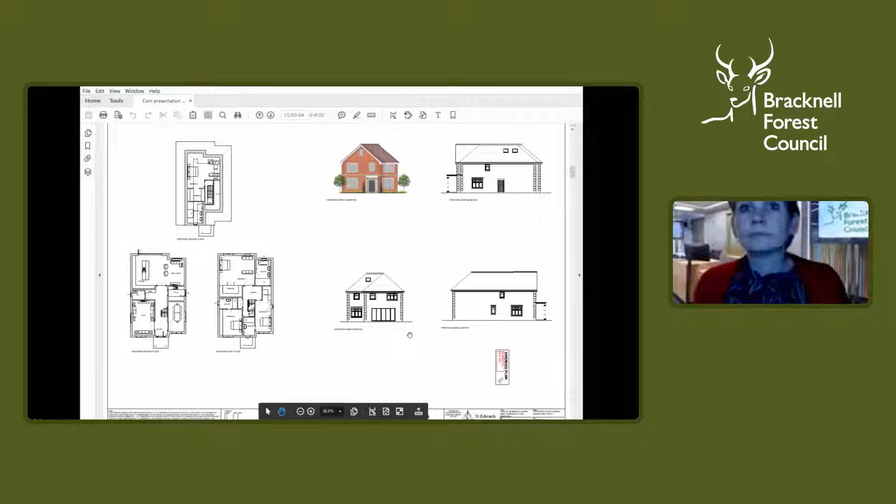Just to show the elevations. The elevation to plot 1 shows a traditional design with a new level of accommodation created in the roof space, lit by a window on the front elevation, then further roof lights to the side and rear elevation, with the additional second floor accommodation shown on the floor plan here.

Plot 2 again follows the same design with the additional accommodation in the roof lit by a second floor window and roof lights. Then plot 3, again a 2.5-storey dwelling, with accommodation again achieved in the roof with roof lights on the front and rear elevations.

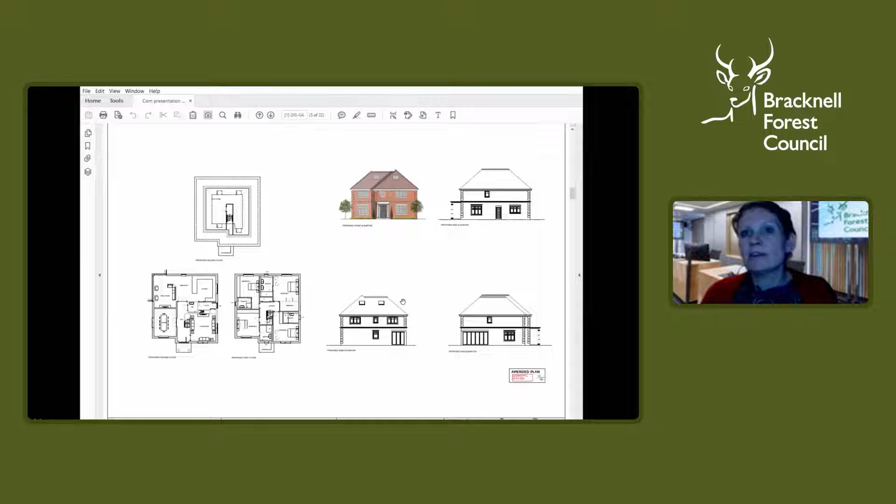I'll just remind members of the approved elevations. So this is the previously approved design for plot 1, plot 2, then the previously approved plot 3.

The photograph on the screen shows the existing 7 Sherring Close. A view of 7 Sherring Close from the rear. Then a view of 7 Sherring Close looking towards the rear of 29 Warfield Road. And a view within the site from 7 Sherring Close looking towards the properties in Husson Road.

A further view of a property along Sherring Close, number 8. Then looking at the side of 29 Warfield Road. A further view of the side of Warfield Road where the access into the site is achieved. A further view looking to the rear, from the rear to the side of 29 Warfield Road. A wider view from in the garden.

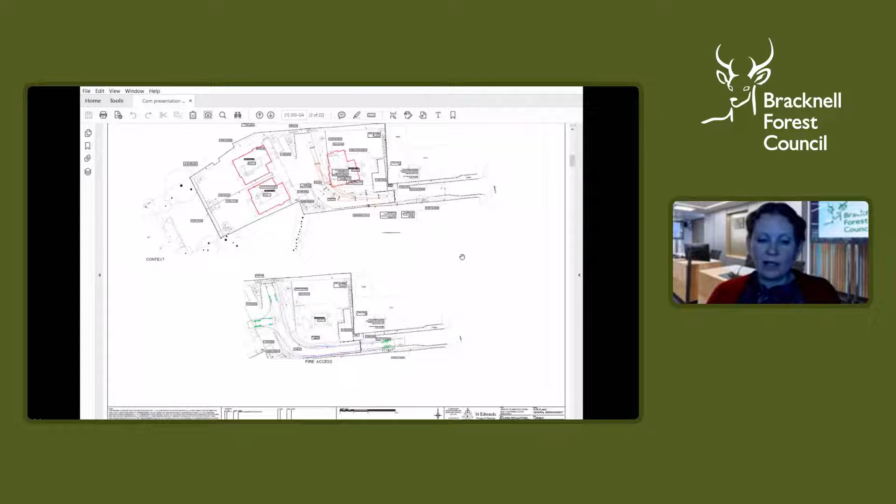The application relates to a full application for 3 dwellings following the extant consent for 3 dwellings. The site falls within the settlement boundary and the principle of 3 houses on the site has therefore been established. The main changes to the dwellings are their designs and sizes and the creation of rooms in the roof to be lit by roof lights. The heights have been amended to be the same as the extant consent.

The site layout has shown the position of the new houses compared with those approved. Separation distances would still allow an acceptable layout to be achieved, whilst maintaining an acceptable relationship with the neighbouring dwellings and impact on the character of the area. The proposal provides 3 parking spaces for each dwelling, which is acceptable to the Highway Authority. The position regarding biodiversity and drainage was addressed under the extant consent, and conditions are proposed to be repeated to address these matters. The application is therefore recommended for approval in line with the recommendations within the committee report and supplementary report.

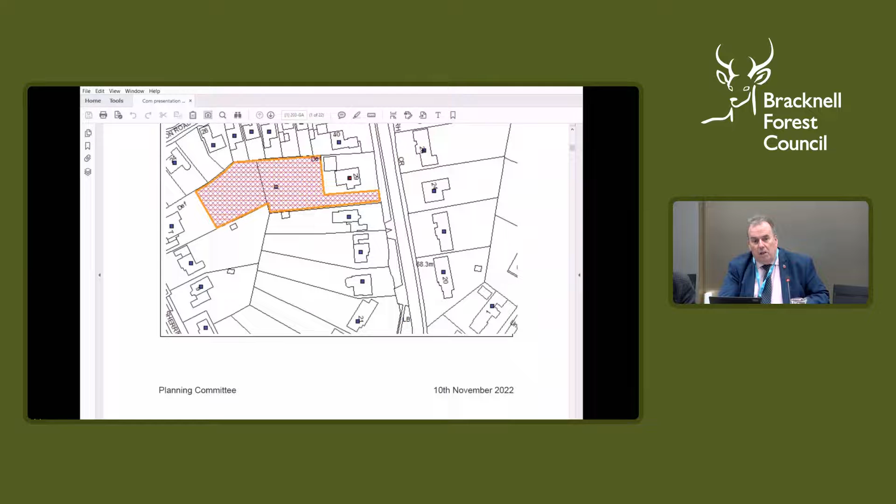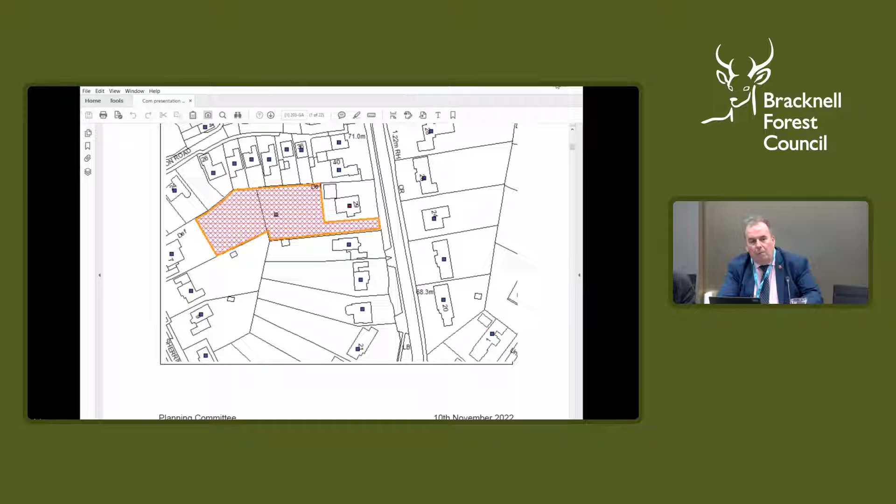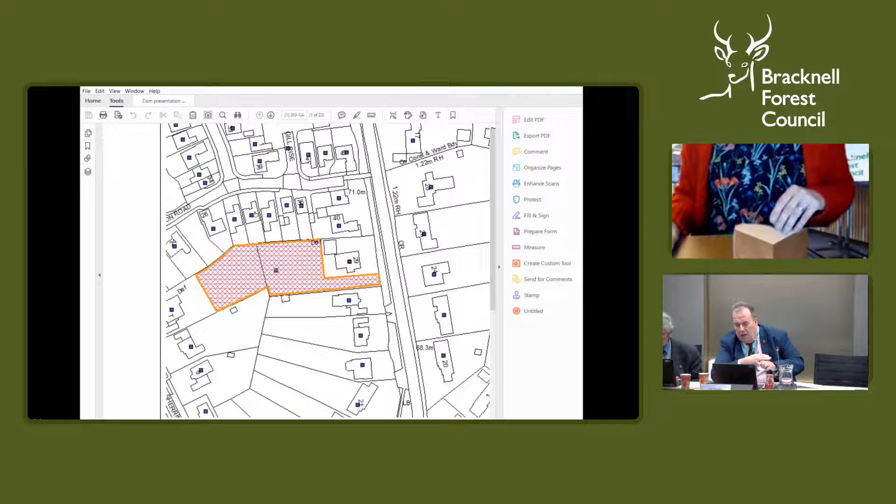Councillor Brown: Thank you, Chair. The first question for me is, what are the differences between the 2 applications before us tonight? If you look on the picture that Katie showed us, Katie, could you put that up again, the one with the red lines, with the new layout? That's the footprint, but there are a number of other things as well, including position. Could you just explain what the differences are between the approved application and the sought application? Thank you.

I'll just share my screen again.

I'm having some difficulty - I think what you're looking for might be on the supplementary report, isn't it Katie? Did you want the actual size differences? No, those are clear on the diagram you showed, but do the conditions like biodiversity and the soft and hard landscaping all coincide with one another now, if these are accepted? Yeah, if you look on the supplementary report, they've all been rewritten to reflect the new application.

But the things on the supplementary are for 365, and 425 has had challenges which have been answered, but I don't know whether they're the same. Could you clarify your question? 365 had lots of different changes under section 3, and will have if 425 didn't go through, but 425 seems to have taken precedence. Are there any differences between those two in terms of conditions or anything else?

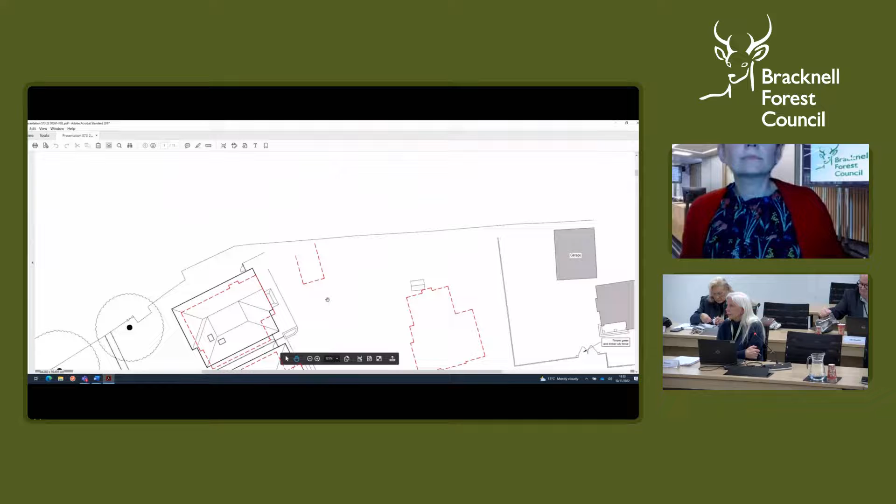On plots 1 and 2, the roof lights have been positioned looking inward, then to the rear, with a separation distance of over 30 metres to the rear of Sherring Close, so there'd be no overlooking to the properties in Husson Road. On plot 3, on this elevation, they're set looking this way, then that way, so there would be no overlooking from this property to the properties in Husson Road.

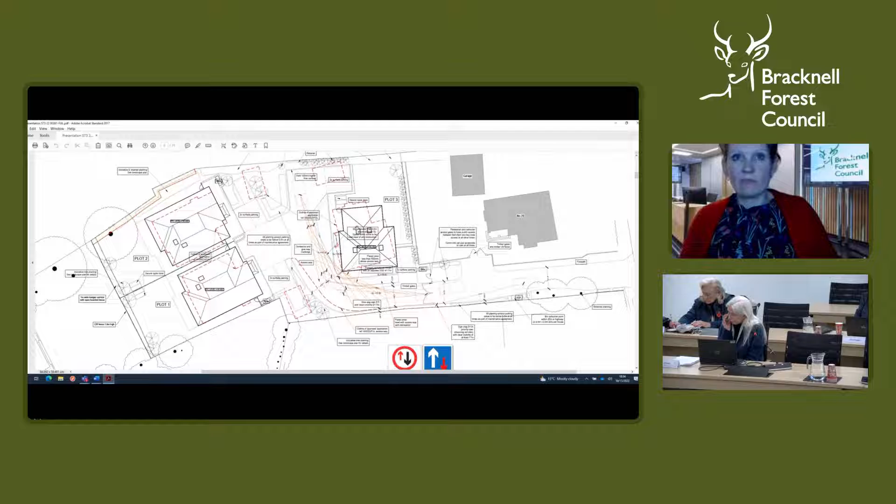And also there are conditions for the roof lights to be set. Plot 1, plot 2 and plot 3 are to be set 1.7 metres above the internal floor levels, which would prevent any overlooking.

Thank you very much, Katie. Councillor Dr Barnard, can I just ask?

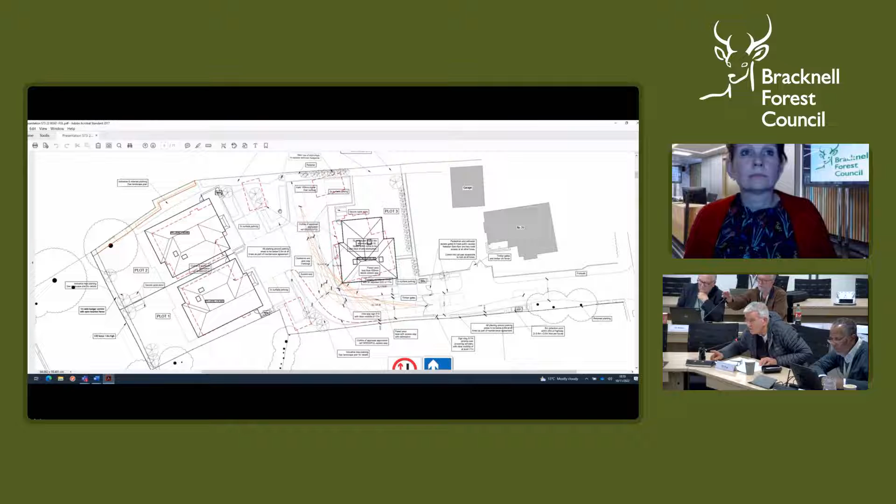Probably again this has been covered, but I noticed they talk about biodiversity - presumably this hasn't been altered from the original permission? That's the question. I noticed there's no report from the biodiversity officer, unless that's in the supplementary, but...

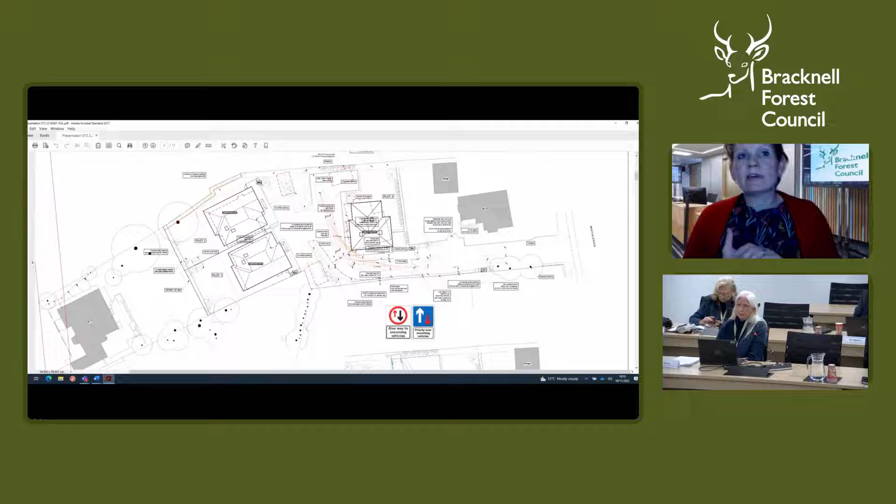No, the biodiversity officer hasn't responded on this application. However, the last extant consent had strict conditions to do with biodiversity, mainly relating to badgers known to forage on the site. Those conditions have been repeated under this application, and under the next application I present, conditions have been addressed in terms of biodiversity, with the biodiversity officer commenting on the mitigation for the badgers.

Okay, thank you. Just for your information, you may not have the supplementary report in front of you, but condition 17 of the supplementary report says the biodiversity enhancements shown on plan 21021 shall be performed, observed, complied with prior to occupation of the dwellings and retained in perpetuity.

Okay. Councillor Dr Barnard, thank you very much, Chair. I have 2 questions. The first relates to when we considered the application on this site before - was there a reason why there was no requirement for any visitor parking?

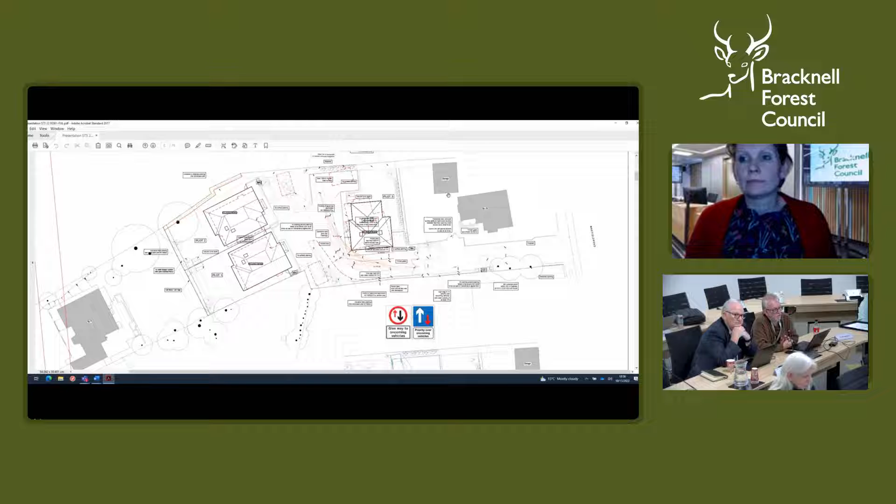Because there's been building work along that road recently, and looking at these plans and the old ones, the only place visitors could park is actually on the main road, because there are 3 spaces. Looking at the layout, I'm not convinced, at the weekend for example, if you had 2 cars plus a child's car plus a visitor, it could soak it up. So it's more really reflecting back on that.

And then I've got another question about the neighbourhood plan, Bracknell Town Council neighbourhood plan. If I can pick up Andy - do you want to pick that up? Yeah, Andy Wells, Highways.

Thank you. Our parking standards SPD table 6 for residential development does not require visitor parking for developments of fewer than 5 units. So there is no parking standards SPD requirement for visitor parking on this development layout. That's the simple answer to your question.

No, thank you. So to be clear, there's an acceptance, therefore, as there was last time, that visitors will have to park on the main road.

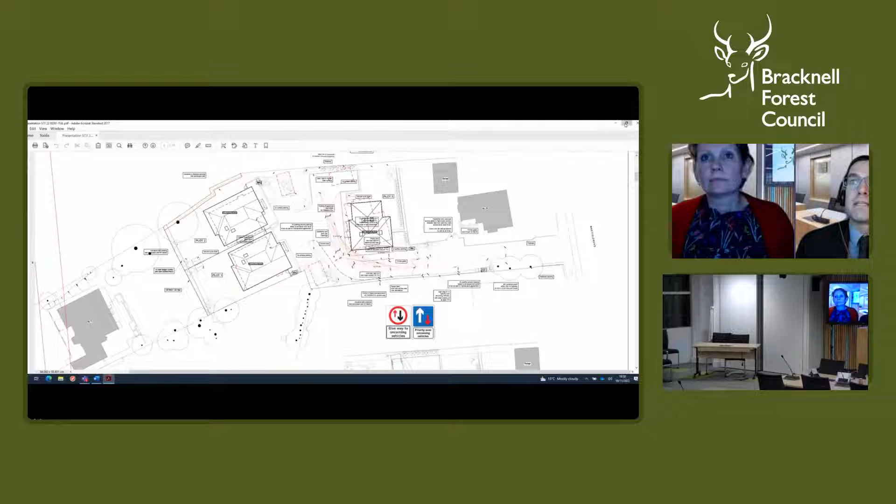There is nowhere on intent... The residential parking standards are intended - 3 spaces per dwelling - to cater for residential parking. It may be possible for visitors to park, particularly in front of the 3 spaces for plots 1 and 2 within the turning head, but our parking standards SPD does not require visitor parking for development of this scale. Equally, the road widths in places may allow visitor parking, but it is going to clog the turning head somewhat.

Okay, yeah. If they park on the main road, they're braver than me.

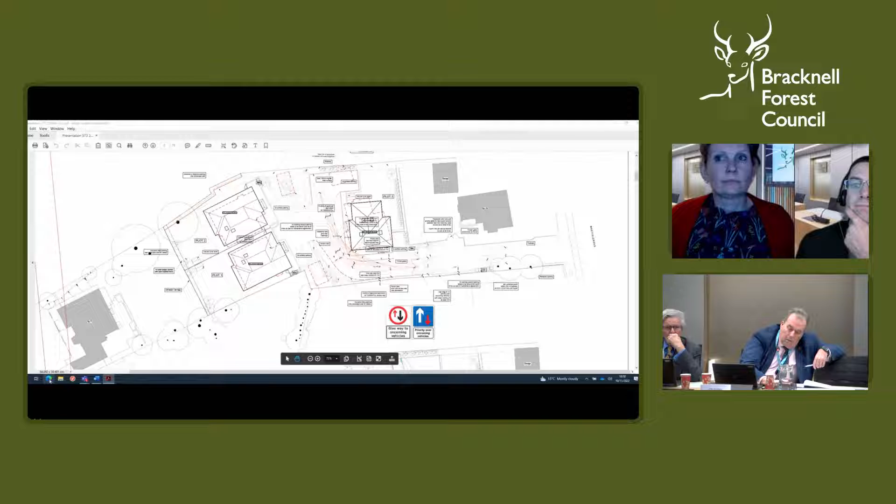My second question is, since we last considered this, I believe that the Bracknell Town Council neighbourhood plan has become a material plan in place. Could the officers please explain, in the context of the Bracknell Town Council neighbourhood plan, if this development is consistent with the aims and ambitions of that, or actually contradicts what was implied by that, as I believe the neighbourhood plan is a material consideration, which is the basis on which a referendum was sought amongst residents.

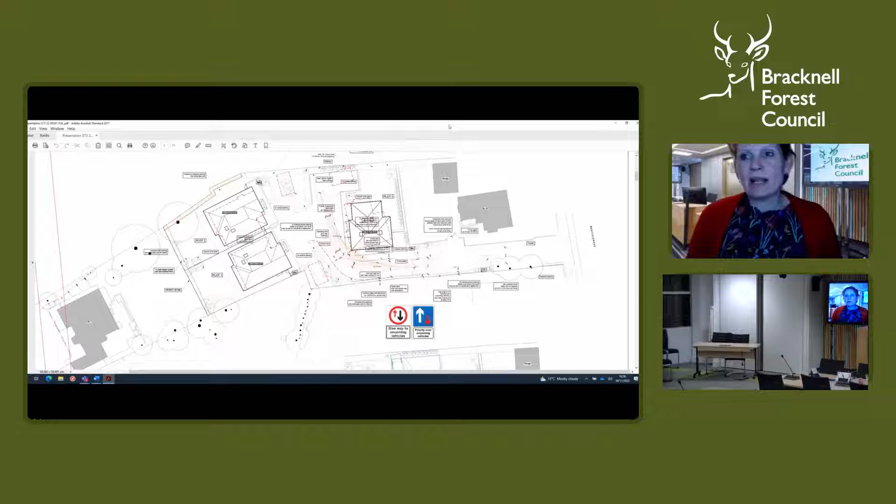I would need to bring up the neighbourhood plan, as there's a specific policy relating to infill and backland development from the neighbourhood plan. However, I don't believe this development conflicts with that plan, but I'd need to bring up the exact policy wording. If I can stop sharing my screen.

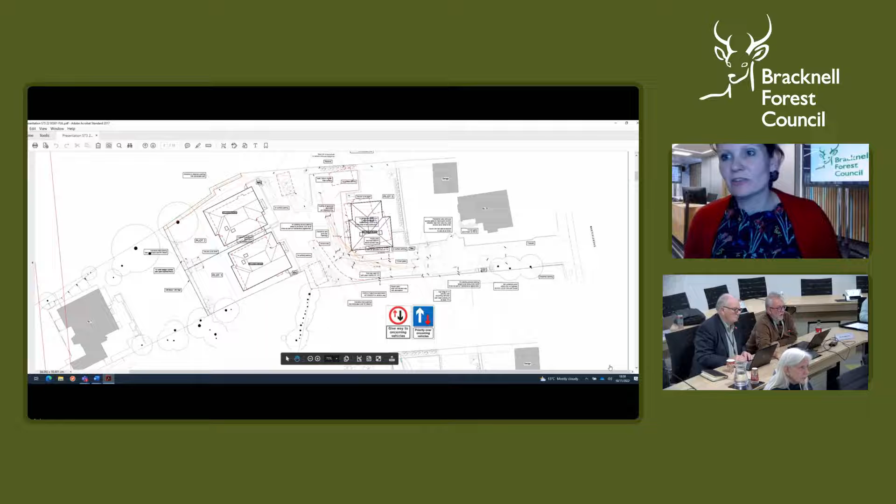I think in this case, I understand Councillor Dr Barnard's question, and quite right, you should ask it. But as there is an extant permission of 3 properties that already had planning permission given before that became, if you like, law, I don't think it applies in this case.

Okay, but in my naivety, Chair, there is an extant permission that was considered without the plan in place. This is a new application which I believe should be considered on its merits, and therefore if any of the detail of this application conflicts with the neighbourhood plan, I think it's something that should have been addressed in the report. Katie, do you want to comment on that?

No, I don't believe it does conflict with the neighbourhood plan. There's nothing that says you cannot have backland development in the plan. It advises that careful consideration has to be given to backland development, but as in this case, careful consideration has been given in terms of its impact on character and on neighbouring dwellings.

I don't believe there's a conflict with the neighbourhood plan. That's helpful. Can I ask that for future applications of this nature, the plan is carefully considered and documented for the benefit of local residents? Thank you, Councillor Dr. Barnard, very good point. Councillor Green.

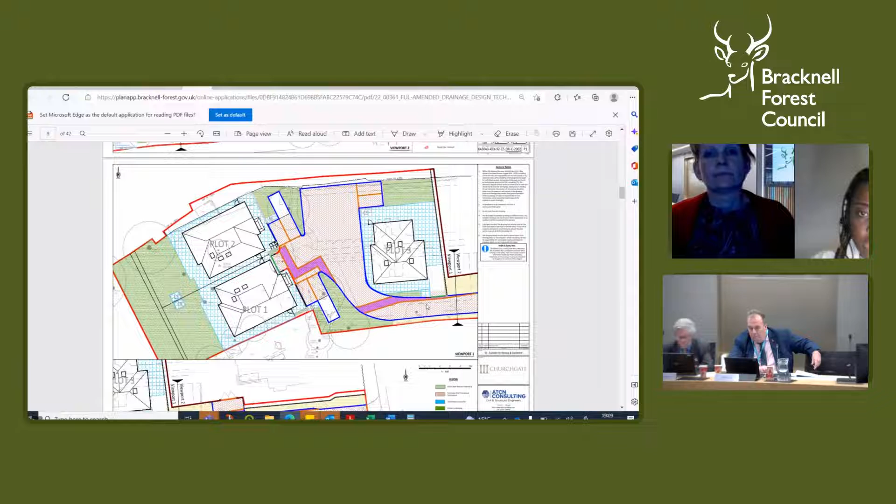Can you see my screen? Yes, thank you. So the brown area here is permeable paving, and then around the plot itself this would be non-permeable construction.

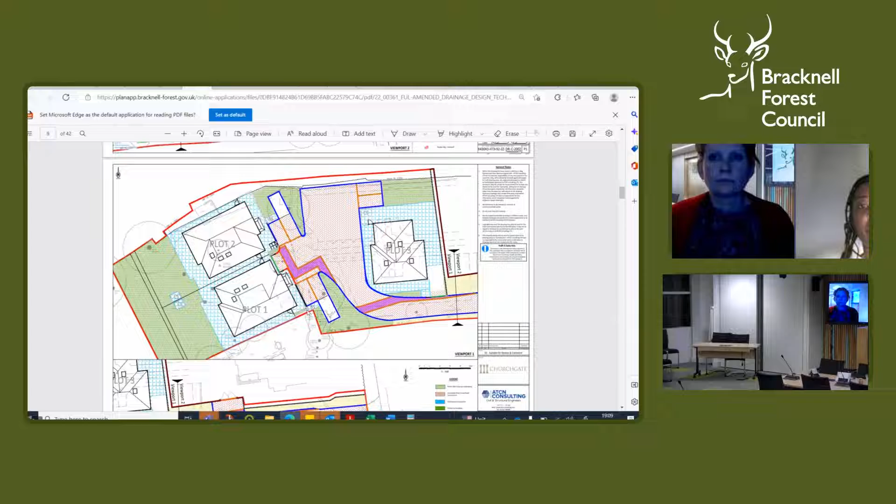So what that would mean is it will have some slopes on there to make sure that the water flows away from the plot onto the permeable paving for drainage purposes. And then all the green area is shown to be public open landscaping area, so it will be green area. So basically the access road and the parking areas will all be permeable paving.

It's also dealt with on the supplementary report, section 21. Yes.

My question, because it's been stated in these reports that the permeable paving is not used as part of the calculations because it can't be maintained for the life of the development. Now, looking at that plan, I think that's most of the hard areas.

What's your question, councillor? How much of the site is actually going to be able to take water, like the green bits that we see there? Well, I think this plan shows it, doesn't it - the green. It's quite a big proportion now that is not exposed to rain and natural drainage.

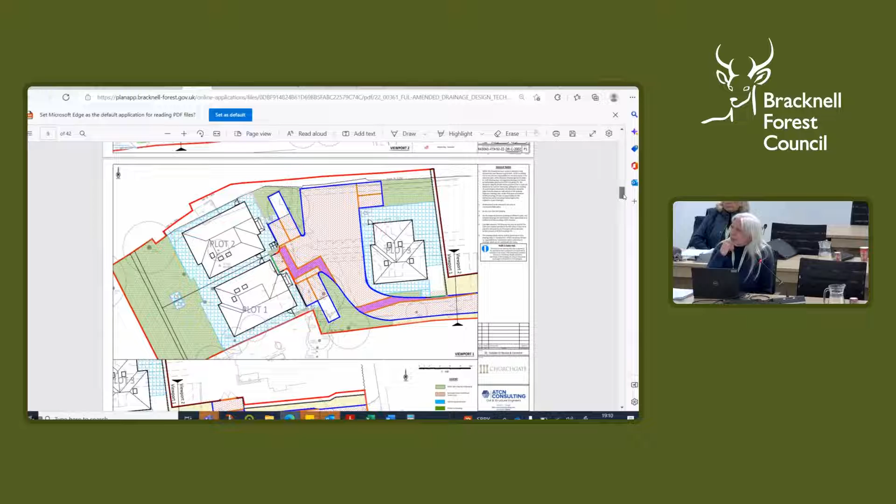As you would appreciate, the green areas would actually be self-draining. You'd imagine it would be some kind of soft landscaping, grassed area. So when it rains, the assumption is that it will drain the water that falls on its own surface. So it would be left with a permeable paving.

As it has been designed, the permeable paving will have some form of storage underneath it. You have a layer, the first layer will be permeable paving, then the granular material, which would be able to provide some storage to soak up any runoff that comes onto it.

If I may just scroll up, these pipes you see here are perforated pipes. So as the water soaks into the permeable paving, if it exceeds the capacity of the permeable paving, this perforated pipe would intercept the runoff, and this is the direction of flow into what is called a manhole with a flow control. It will restrict the flows leaving the site westwards and into a culvert here. So that will be the drainage scheme for the permeable paved areas.

When it comes to the plot itself, the buildings, or the water that falls onto the roofs, as part of the drainage strategy they have proposed underground tanks. These are what you see in the blue shading - underground geocellular tanks, quite big, massive underground tanks that will intercept the flows from the plot itself. That will also direct it into the manhole I previously mentioned, and it will flow westwards and out of the site.

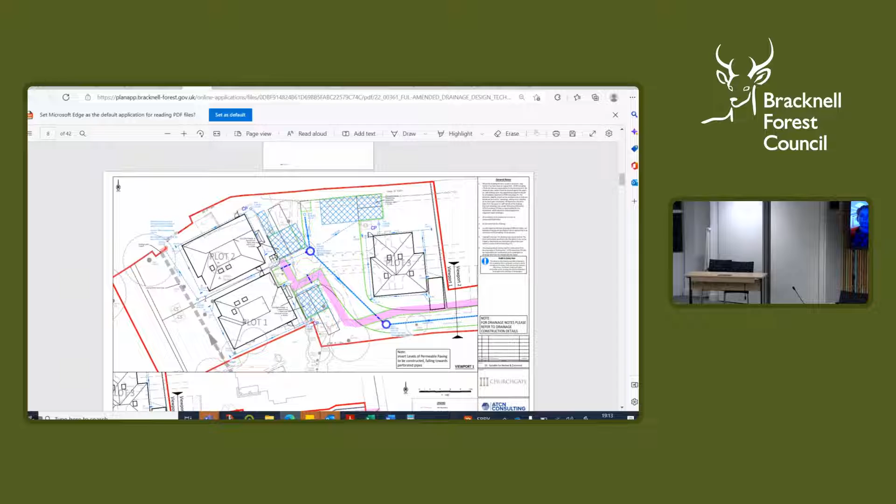Katie, just one question, and that's to do with the gates. I know there's a provision for gates within a certain distance from the highways, and in fact it's covered in the supplementary in considerable detail in terms of how it's going to operate with the intercom system. There's a box underneath that, and I wonder what the wording is and what it represents. I think it's on the site plan, and there's an arrow going up, and I wondered what the box actually says. It's too small to see on the screen, maybe you could blow it up or tell me what it says.

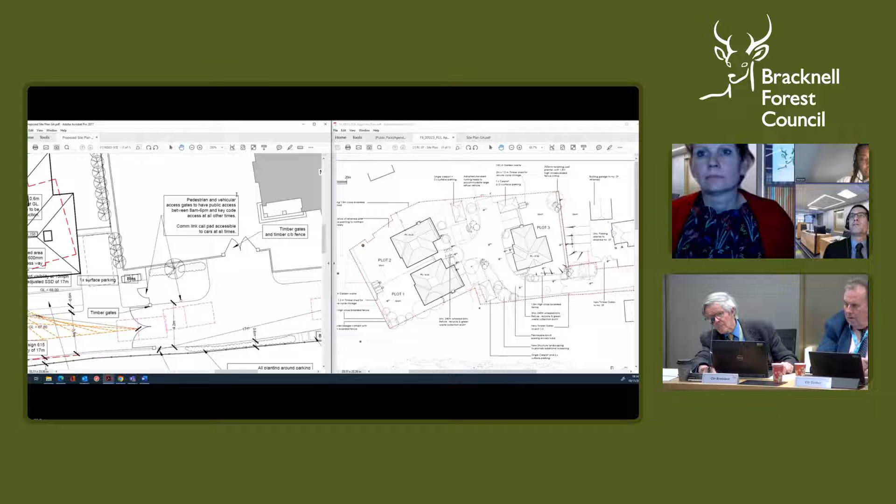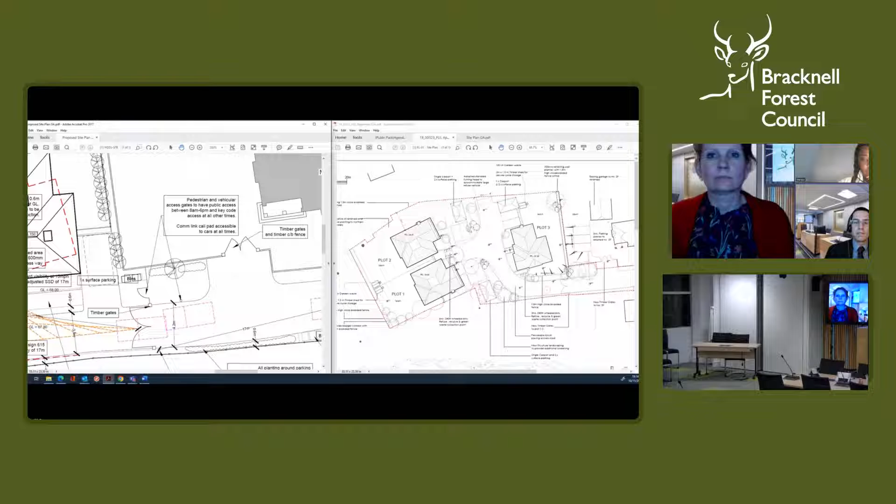The annotation says pedestrian and vehicular access gates to have public access between 8 AM and 6 PM and key code access at all other times. Call pad accessible to cars at all times. Nevertheless, there is a condition on the supplementary which requires details of the operation of the gates and any access and intercom system to be provided. So, notwithstanding what text is shown there, the details of the operation of the gate and its access arrangements still need to be provided by condition.

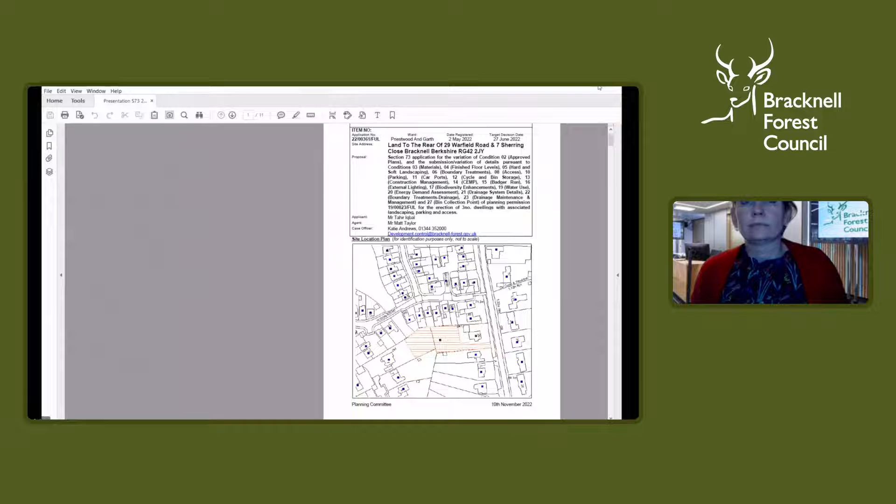Can you see the plans? Yeah, I can, it's quite small. If you can make it larger, that would be useful. Thank you.

This application relates to a Section 73 application for the erection of 3 dwellings. The applicants have applied to vary Condition 2, the approved plans condition, to allow consideration of amendments to the original application. The main amendments would result in the dwellings using the roof spaces and creating extra rooms with the use of roof lights.

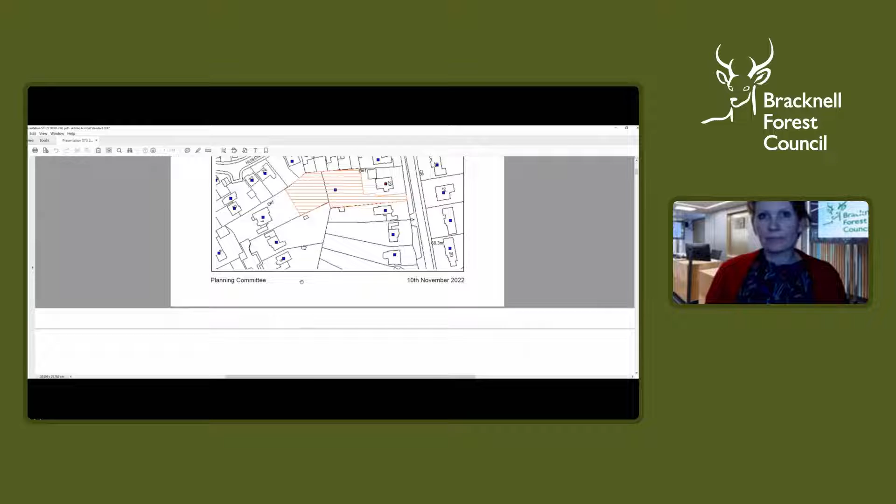Just go down to the site plan. Positions of the dwellings to the boundaries have been amended in this application, with the red line again showing the previously approved dwellings and the new position of the new dwellings. On this application, plot 2 extends slightly further to the side boundary compared with the previous application. Plot 1 extends slightly out to the rear and slightly to the central boundary, with plot 2 doing the same. Then on plot 3, the dwelling has been shifted to front the access road, whereas before it was slightly at an angle.

Parking is shown in these locations for the plots with 3 spaces. For plot 3, they have 2 parking spaces here, parking space there. The relationship with 29 Warfield Road is very similar to the approved application. I'll just show the elevation.

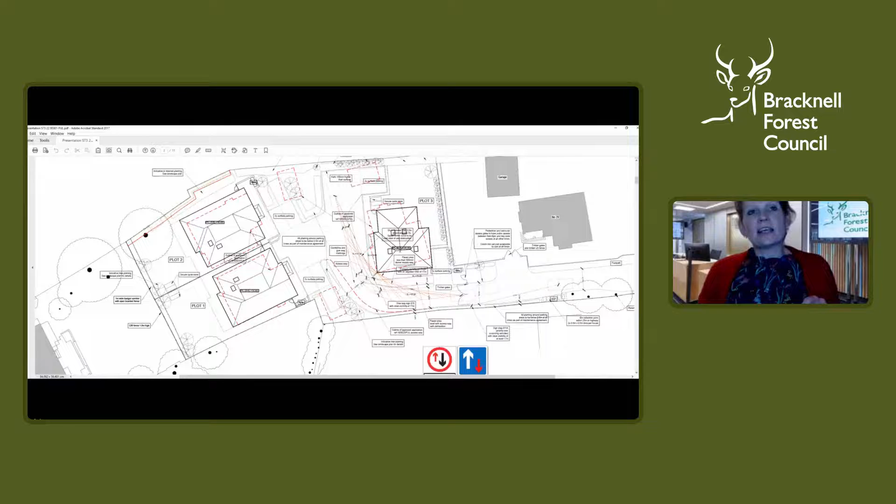Katie, can you just explain how this differs from the application we just approved? So in the full application you just approved, plot 3 was located closer to the side of 29 Warfield Road, and additional land was taken from within the boundary of Warfield Road. Plots 1 and 2 are slightly different - they're smaller than the last application, but plot 2 extends slightly further towards Hutton Road. Again, the dwellings are proposing rooms in the roof space, which the last application did.

So the changes probably aren't very significant compared with the last application, but this application has been dealt with under a Section 73 because the red line was exactly the same as the approved application. This application also proposes to discharge conditions, which I'll run through now.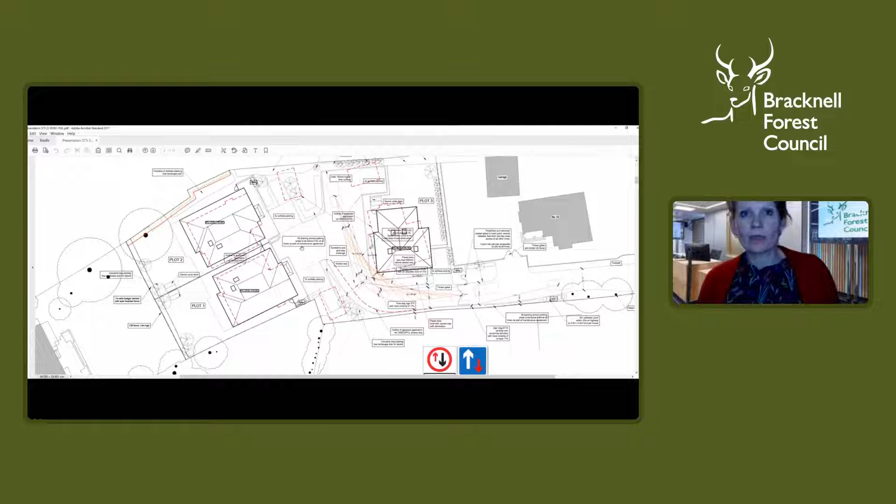Councillor Birch: on a point of procedure, given how I voted on the previous one, have I predetermined this one? Response: No, I don't think so, because these are just changes to conditions. Fine, thank you.

Would somebody like to confirm that the advice I've just given Councillor Birch is correct? I'm happy to do that. This application materially is going to come up. Yeah, I'm happy to confirm that as well. It's a different type of application, so I don't see that. You've got to determine both applications, and you've got to do them in a certain order, so I can't see that doing them in any particular order is going to predetermine anything. Thanks. Thank you.

Just let the officer finish. Have you got a question on procedure? Yes. What if we now pass 361? Is that going to take precedence over 425, or if we pass both can they choose between them? Max: the latter. You can have more than one planning permission on a site, as we know, and it is up to the owner/developer as to which one they implement. Right, carry on, Katie. Thank you.

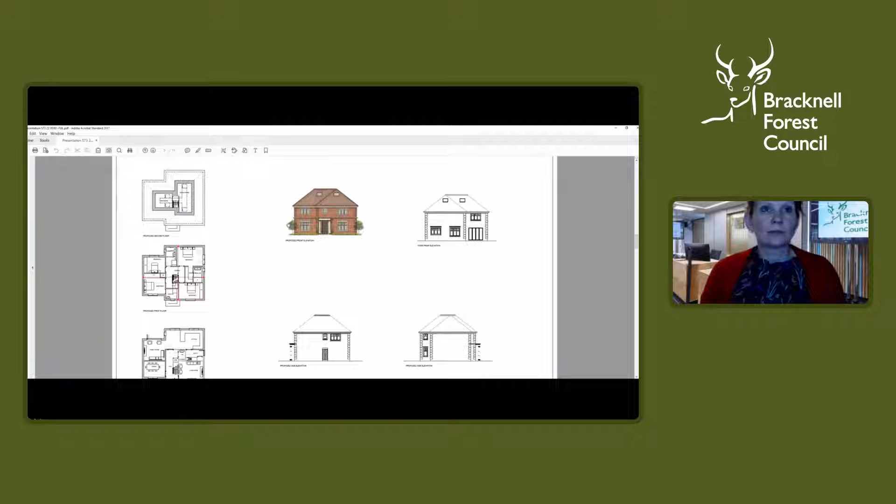Moving on to plot 2, which is the same design and relationship with the room in the roof. Plot 3 again has the room in the roof with the four roof lights. And again, the approved elevations for plot 1, plot 2, and plot 3.

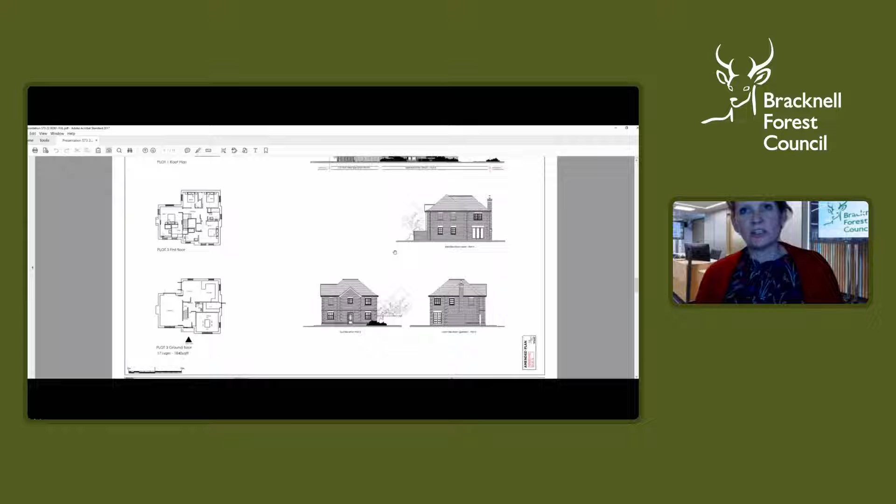I won't show the photographs again under this. The applicants have also applied to discharge the planning conditions attached to the original consent. These related to condition 3 materials, condition 4 finished floor levels, condition 5 hard and soft landscaping, condition 6 boundary treatments, condition 8 access, condition 10 parking, condition 11 carports, condition 12 cycle and bin storage, condition 13 construction management.

Condition 14 biodiversity construction environmental management plan, condition 15 a Badger Run, condition 16 external lighting, condition 17 biodiversity enhancement, condition 19 water usage, condition 20 energy demand assessment, condition 21 drainage system details, condition 22 boundary treatments in relation to drainage, condition 23 drainage maintenance and management, and condition 27 in relation to a bin collection point.

The application proposes a material amendment to 19/00023/4, which granted planning permission for 3 dwellings. The principle of development remains acceptable. The principle of backland development was established under the approved application, and the proposed dwellings have largely been laid out in the same position.

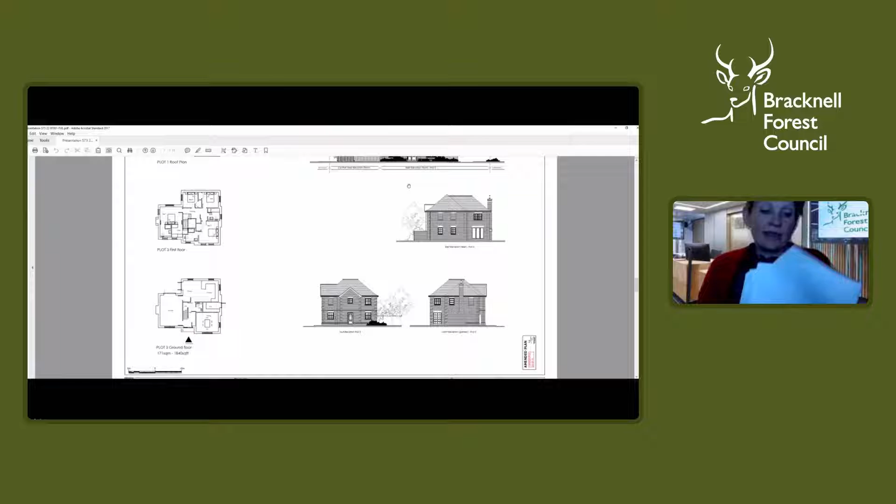Further timber post and rail fence is provided to the garden of plot 2 to provide an unmanaged topsoil area to enclose natural self-seeded plant growth. The application has been amended following advice from the Council's biodiversity officer that additional access under the fences should be provided, and badger gates have been included under the fences. However, details of the timber gates and retaining walls have not been provided, and a condition is required to be reimposed to request these details.

Conditions 8, 9 and 10 relate to access, construction and materials, and visibility splays and parking arrangements. The conditions are required to be retained and reworded.

Condition 13 requires the submission of a method of construction statement. The Highway Authority have advised that the latest submission is not acceptable, and changes will be required. A further condition can therefore be applied to require this, along with a requirement on how the construction act will address noise and disturbance.

Condition 14 requires the submission of a construction environmental management plan in relation to biodiversity. This has been considered by the Council's Biodiversity Officer, who raised no objection to the condition being discharged.

Condition 15 requires details of a badger run to ensure that badgers known to inhabit the site would be able to traverse across and forage in the gardens of the new development. The applicants have shown the information, including 2 badger gates and a 1 metre wide badger corridor with open boarded fences. This information has been considered by the ecology consultant, who has raised no objection to the badger run, and the condition is therefore recommended to be discharged.

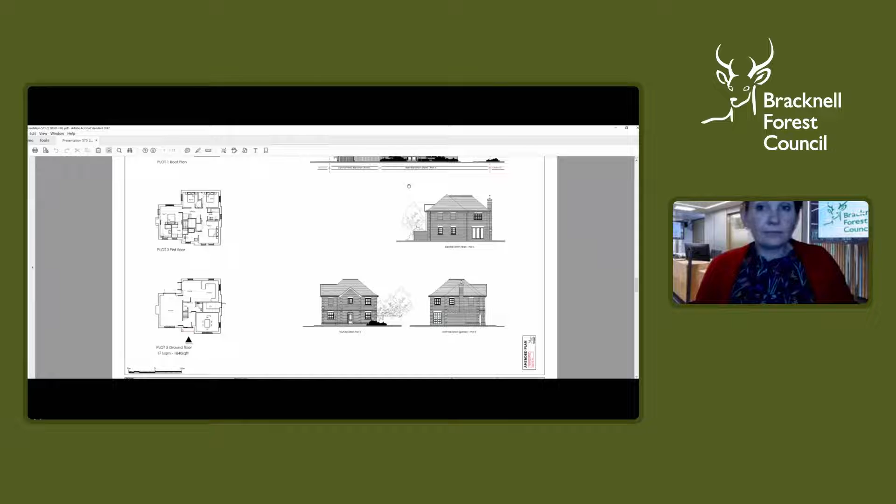This is a Section 73 application, which results in a material amendment to the approved application 19/00023/4. The amendments to the approved scheme are considered to be acceptable and would not significantly harm the amenity of the neighbouring dwellings or amenity of the surrounding area, in line with the extant consent. The application also seeks approval of details submitted pursuant to a number of conditions of the original consent. Some of the details have been found acceptable, such that the conditions are recommended to be discharged. However, the details submitted pursuant to conditions 5, 6 and 13 are not considered sufficient, and it is proposed that they are reapplied as under 19/00023/4. On this basis, the Section 73 application is recommended for approval in line with the committee report and the supplementary report. Thank you.

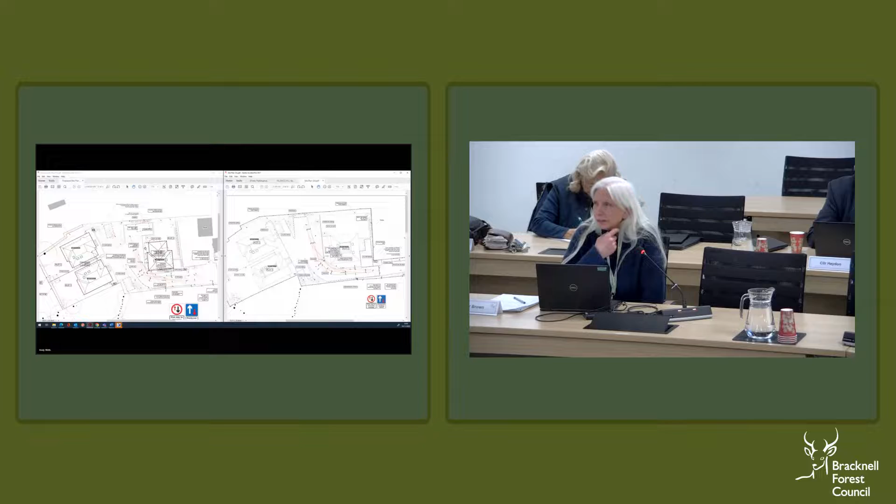Okay. So you've got 2 spaces here and 1 here. You've got 3 spaces down here.

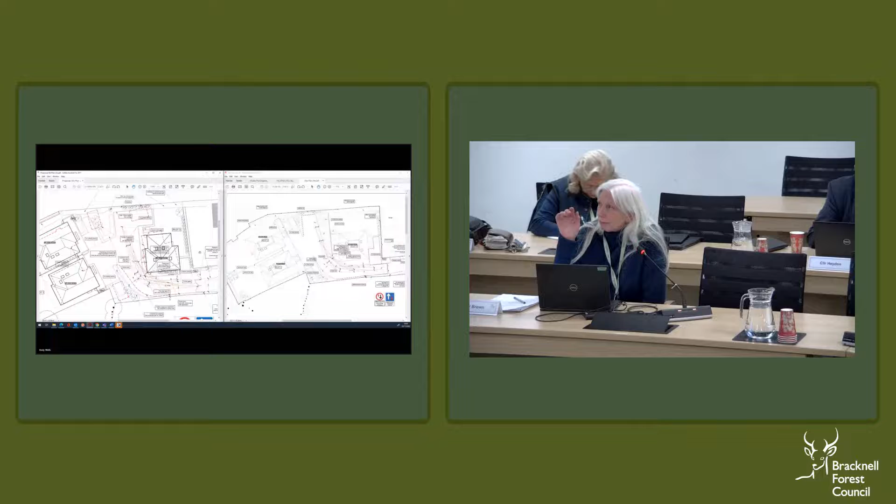425. Does the extant application have the spaces in the same location as now proposed? No, the extant application had 2 car parking surface spaces and 1 carport for each of the dwellings.

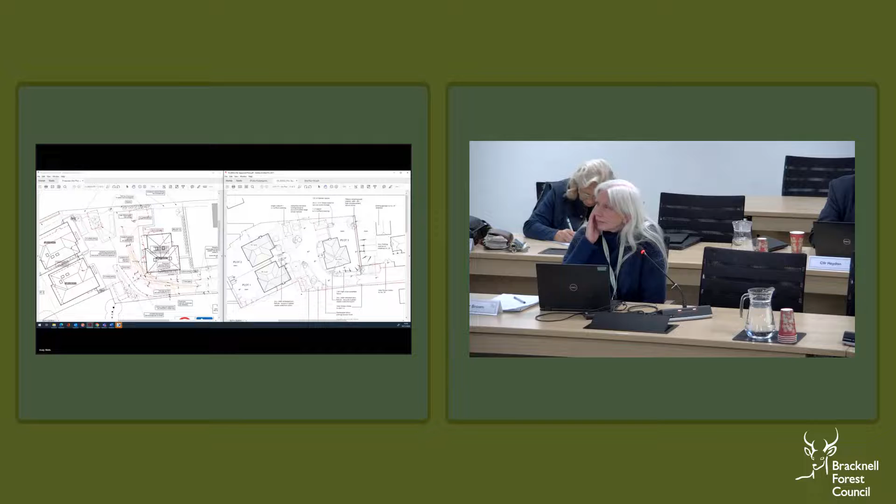Those carports you can see on my shared screen are dotted in red on the section 73. So originally plot 3 had 2 spaces in the carport to the north, and now it's proposed 2 spaces to the north and 1 space to the southeast.

And on plots 1 and 2, where there were carports proposed under the original application, they've been removed and replaced with another surface space.

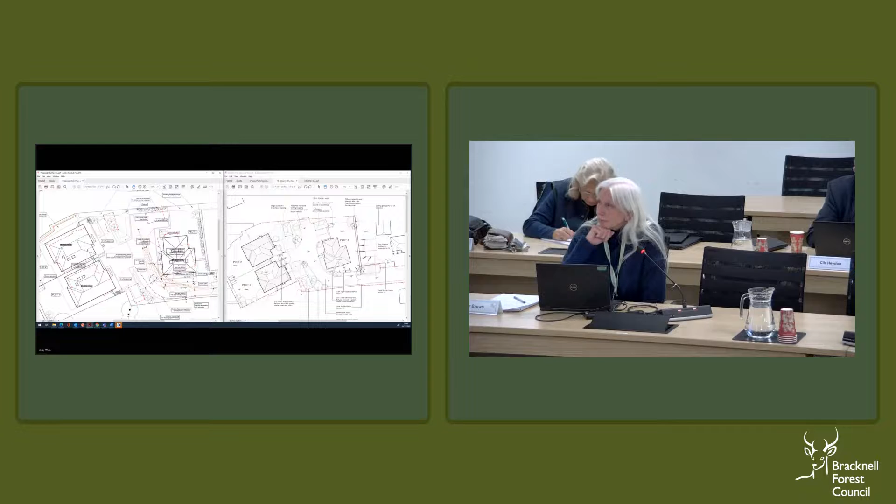Okay, thank you. Any other questions? So there's no other questions. I'll move the officer's recommendation.

So on page 58, supplementary pages 6 to 11, as amended by the supplementary report. I have a seconder, please. Councillor Birch, thank you.

As you've seen, I'm not going to go through all of the slight changes to the conditions that have been discharged because the applicant has undertaken them, so this is a relatively minor change, but of course it's like Kaizen, isn't it? It's little bits of lots of conditions. So I'll ask you to bear that in mind when you take your vote.

Does the seconder wish to speak? Reserved. Thank you. Thank you.

Councillor Barnard: I think as the last period of time has shown, and can I say thanks to the officer for going through it, I'd like, Chair, for you to take away to see if there is a more elegant way of summarising when changes are made, because if we're here to form appropriate scrutiny of applications to make sure we pick these up, I'm not suggesting for one moment there's anything wrong with it. That was just really difficult to follow.

It was, I agree. And I know there are set ways of doing this, but in every other walk of life, you would have a summary document that would highlight where the main changes are, referencing where they are elsewhere. Now, I know we don't often have this situation, but I'd just like you to take away, Chair, to try and make it easy, because if we're struggling, and we sit doing this on a regular basis, if there's an element of public scrutiny, that might be quite hard for them to follow such changes as might exist.